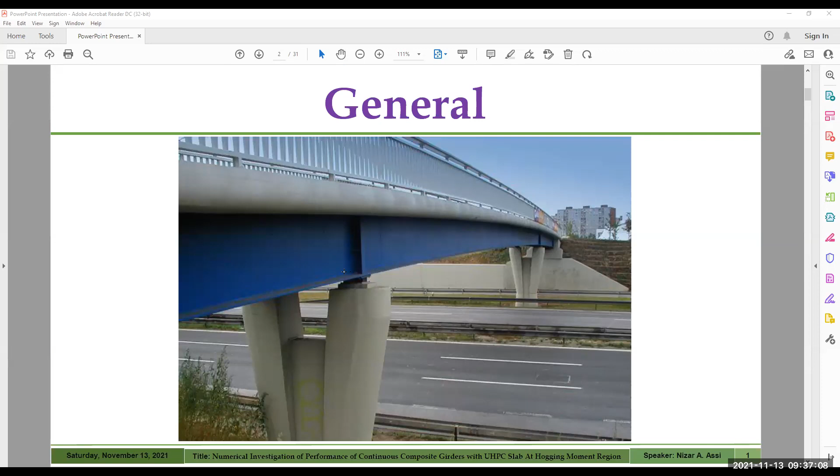One application we see in real life is the bridge, where we have steel beams that support concrete slabs. The most important thing in composite construction is that it mainly depends on the composite action between the concrete slab and steel beam.

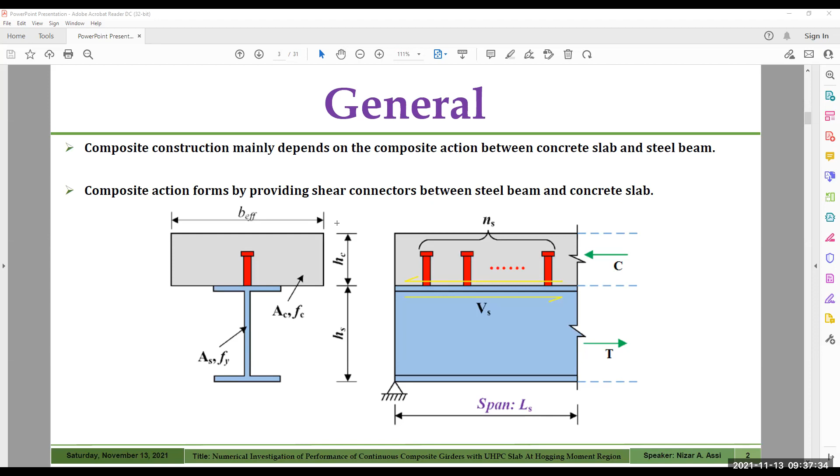This composite action forms by providing adequate shear connection between the steel beam and the concrete slab. If we don't provide any shear connection, there will be a huge slip between the two sections and no interaction between them, with slip taking place at the interface between the slab and steel beam.

With a partial connection, a partial interaction between the two materials will take place, and a small slip will happen at the interface. With a full degree of shear connection, we'll have full composite action, complete interaction between the two materials.

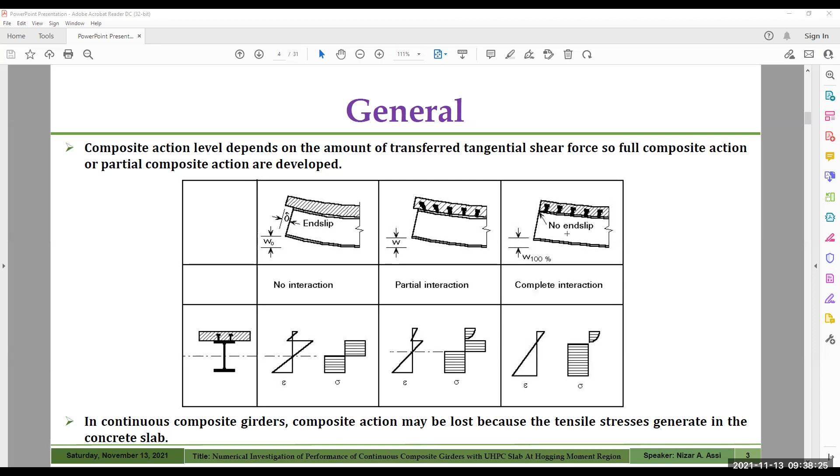However, in continuous composite girders, this composite action may be lost due to the tensile stresses generated in the concrete slab. Different researchers have tried

different construction schemes to maintain the composite action at the Hogging moment zone for continuous composite girders, like internal and external pre-stressing techniques, carbon fiber reinforced polymer (CFRP) sheets bonded to the top of the concrete slab at the Hogging moment zone, and steel fiber reinforced concrete at the Hogging moment zone.

I did an experimental study to investigate the behavior of these girders retrofitted or strengthened using ultra-high performance concrete. The findings were that the composite action and the negative moment were maintained for the service load level.

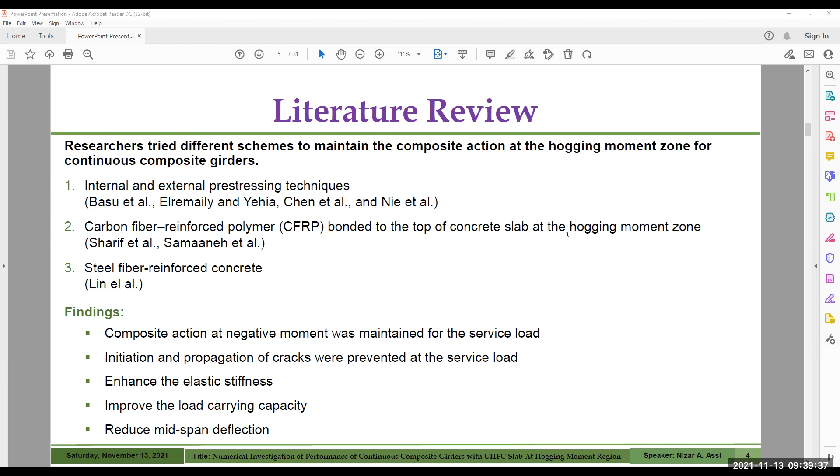The development of cracks was prevented at service loads, and we increased the service load level. An enhancement was obtained for the stiffness of the girder and the load carrying capacity, and the mid-span deflection was reduced as well. The current research

is to develop a three-dimensional finite element model for the continuous composite girder with UHPC slab at the Hogging moment zone, using the commercial nonlinear finite element software ABAQUS. This model will be developed for composite girders with the ultra-high performance concrete slab at the Hogging moment region and will be validated with the experimental results as done previously.

This validated model will be employed to conduct a parametric study to evaluate extra variables of the UHPC slab, such as the effect of the UHPC slab length. I consider only one variable, the effect of the UHPC slab length at the Hogging moment zone, on the behavior of continuous composite girders.

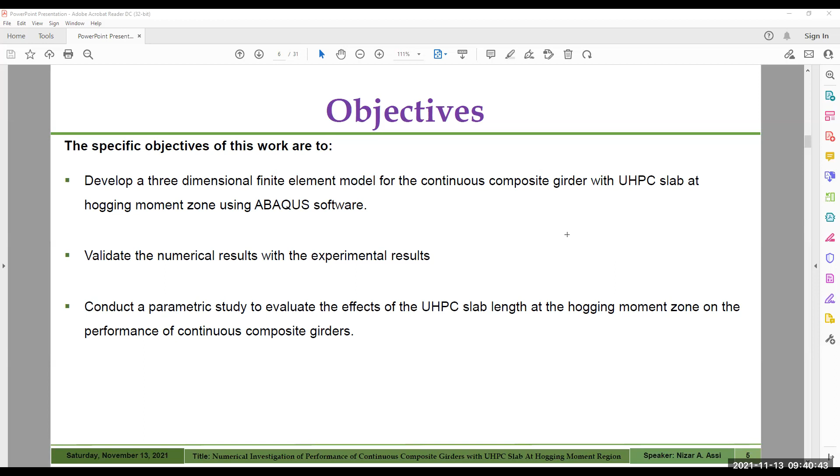The ultra-high performance concrete was cast at the negative moment region, which has a length of 1300 millimeters. The load is applied at the mid of each span, two-point loads, one on the left span and the other on the right span.

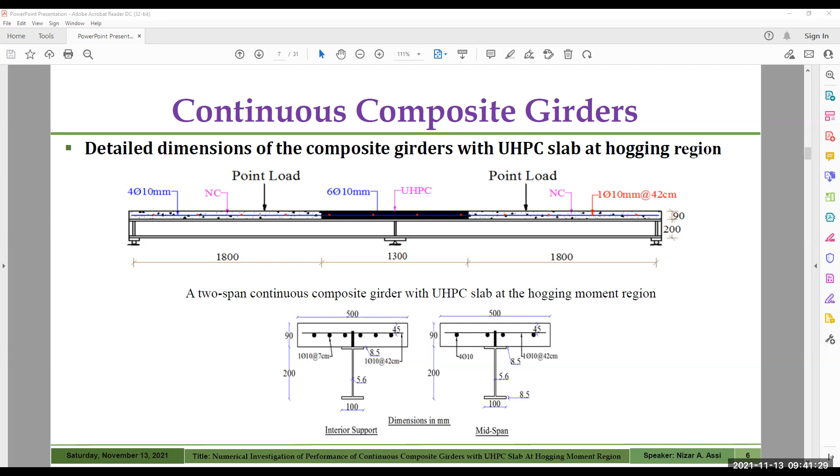The experimental work conducted previously considered only two variables: the spacing between the shear connectors at the negative moment region, meaning the degree of shear connection between the concrete slab and the steel beam, and the thickness of the UHPC slab used at the hogging moment region. So four girders were cast and tested experimentally to consider these two variables. But that experimental work did not consider the effect of the length of this UHPC slab at the hogging moment zone.

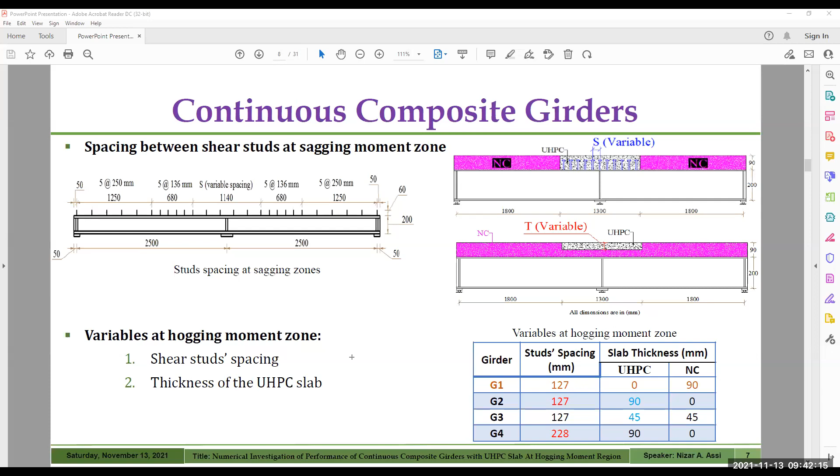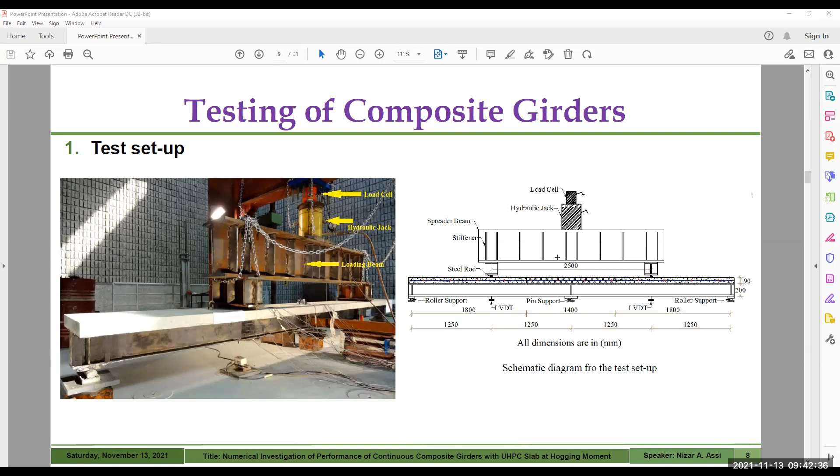Now I will talk about the content of the current study: finite element modeling of continuous composite girders with UHPC slab at the hogging moment zone. Different models were developed using ABAQUS software, a finite element based software, to conduct this numerical study. Four models, identical to the experimental study, called G1 up to G4, were developed for the sake of validation and calibration of the model. Another six models were developed for conducting the parametric study to evaluate the effect of the length of the UHPC slab on the performance of the continuous composite girder.

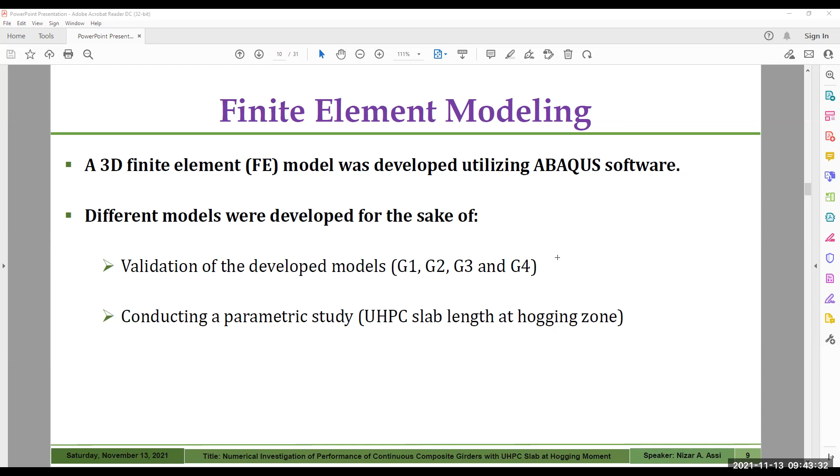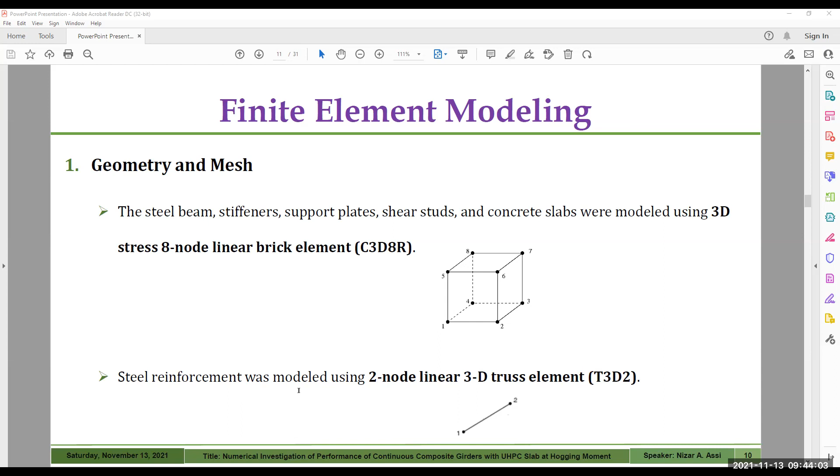First of all, let's talk about the geometry and mesh modeling. Different elements were incorporated in this finite element modeling for the steel beam, steel stiffeners, steel plates over the supports, the shear studs, and the concrete slabs. A 3D stress 8-noded linear brick element was used to model these parts, while for the steel reinforcement, a 2-node linear 3D truss element was used. The geometry of the developed 3D finite element model and the overview of the mesh model are shown in these slides.

Mesh sensitivity analysis was conducted to reach the proper size of meshing that will not affect the behavior or the results of this study.

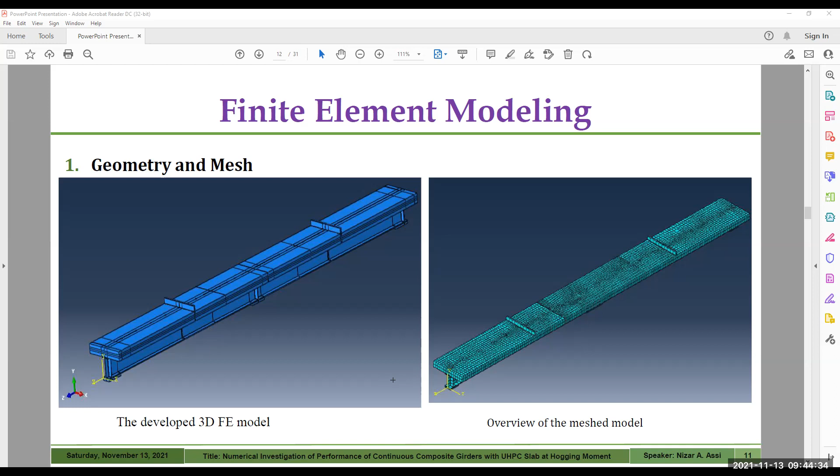For the interaction between different materials and bonds in the model, we have different contact types as shown in this table. Tied, or perfect bond, was used to model the connection between the stiffeners and the steel beam, bearing plates and the concrete slab, and shear studs and the steel beam. While normal and shear friction was used to model the interaction between the concrete slab and the steel beam, the layers of normal concrete and ultra high performance concrete, and the shear studs and concrete slab. The steel reinforcement within the concrete slab was modeled as embedded elements inside the concrete slab.

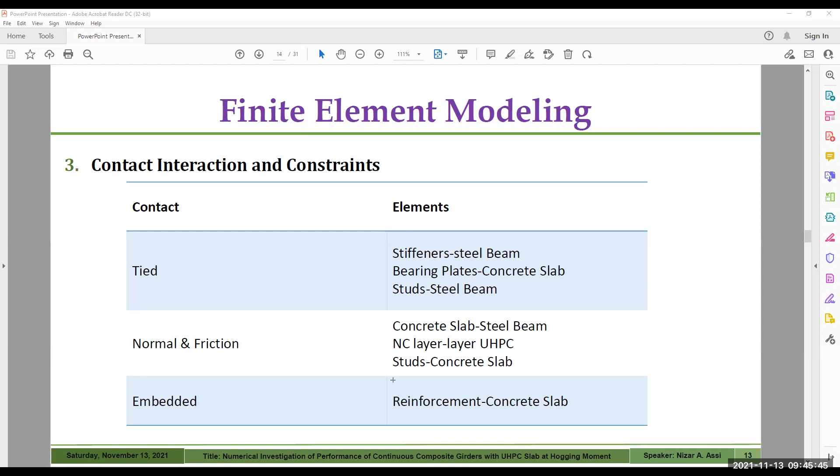For the material modeling, normal concrete and ultra high performance concrete were modeled using the concrete damaged plasticity model. For the elastic properties within the elastic range, this table shows Young's modulus and Poisson's ratio. As you see here, the Young's modulus for ultra high performance concrete is double that of normal concrete, so we expect that the behavior of girders strengthened using this type of concrete will have higher stiffness within the elastic range, and this will be observed when discussing the results.

Material nonlinearity was considered in the model, so the stress-strain diagram for concrete materials in tension and compression was modeled in ABAQUS software.

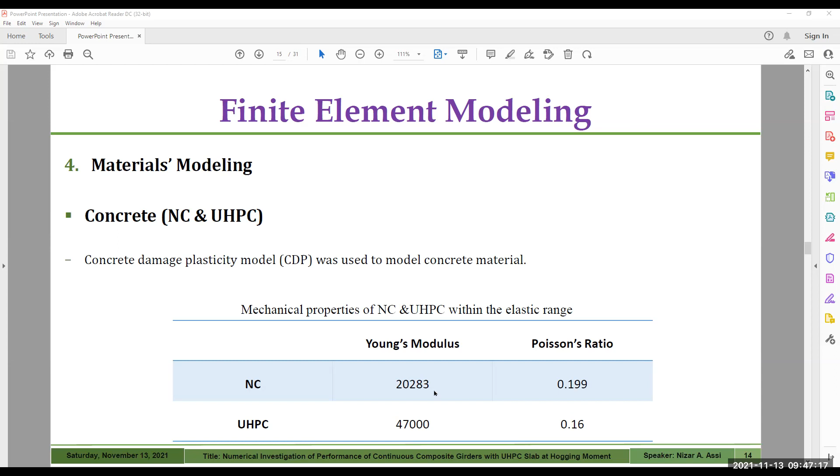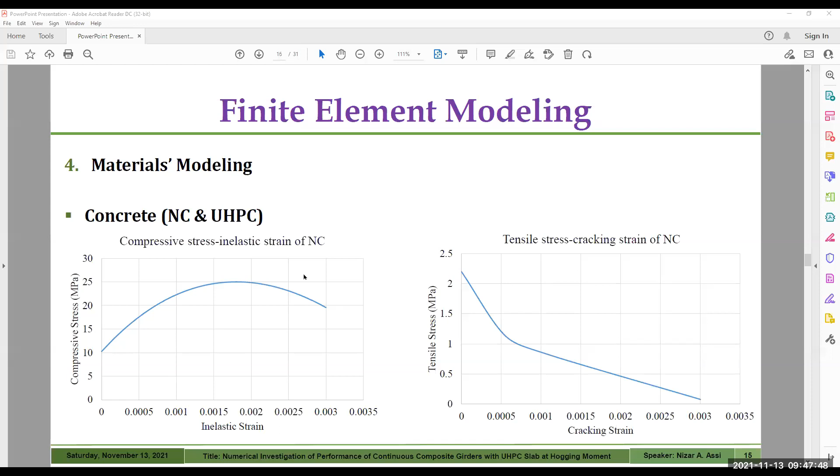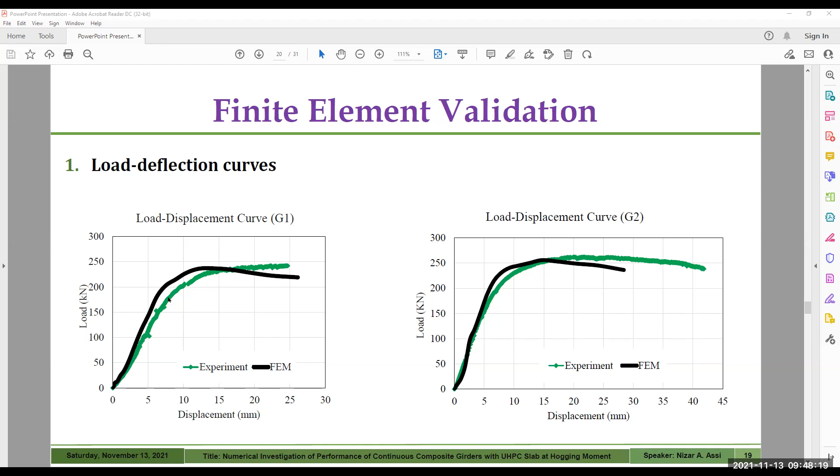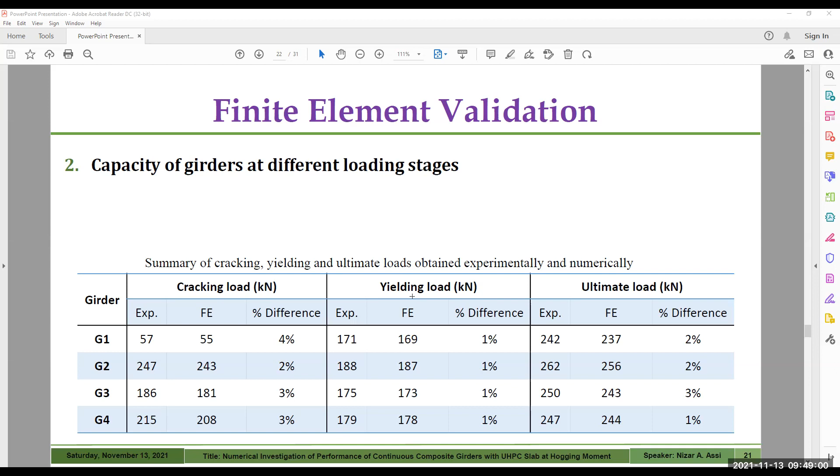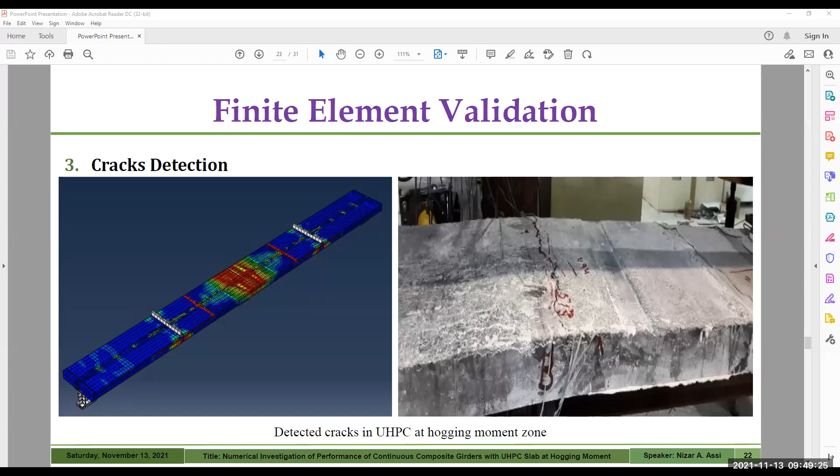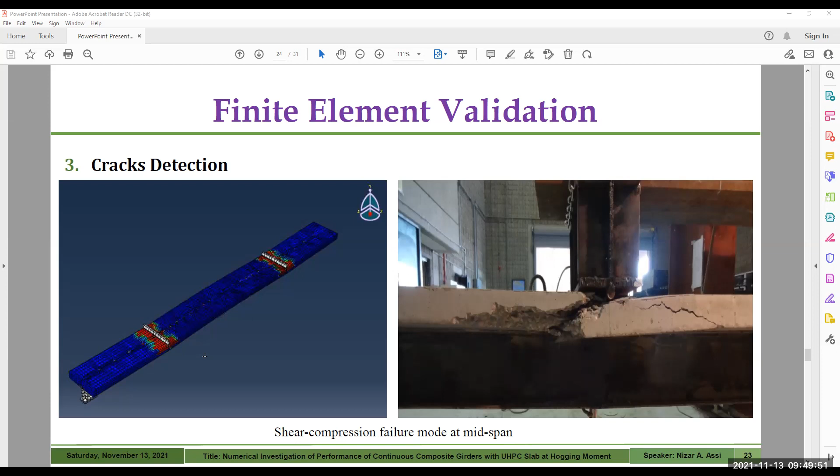The model also detects the mode of failure, the shear compression mode of failure, which took place at the midspan in the concrete, on both spans, because we have symmetry in the specimen. So we can conclude that this model is validated and can be used to predict the effect of new parameters which were not tested experimentally.

Therefore, we decided to extend this experimental work numerically and investigate the effect of the length of the UHPC slab, to see what is the probable length that achieves the desired performance of the UHPC slab.

From the experimental study, we concluded that half depth UHPC slab thickness and 50% degree of shear connection are sufficient to achieve the desired performance of the continuous composite girders. Therefore, I will continue with the numerical analysis using 50% of full shear connection and 45mm thickness UHPC slab. The only variable I will show now is the length of the UHPC slab, this length.

So I tried numerically to model the continuous beam considering different lengths. First one with no UHPC, which is the control specimen. Second one with a 300mm length, up to 1500mm UHPC slab length. And then we'll see the results now.

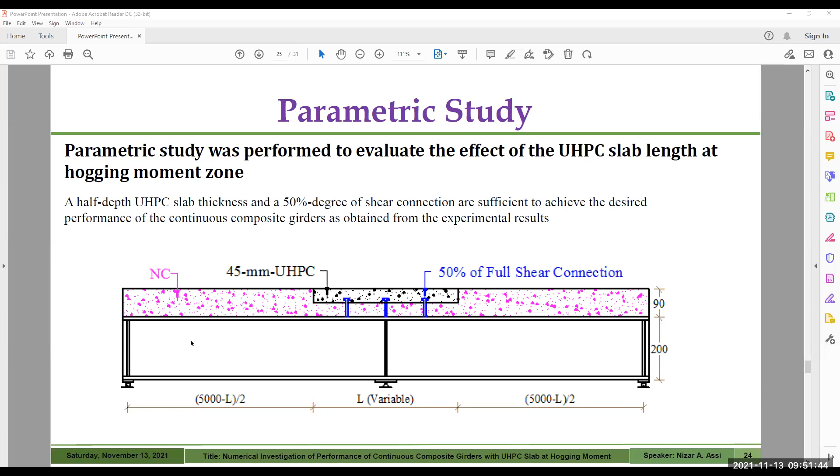Within the elastic range, during this early stage of loading, as increasing the length of the UHPC slab, the stiffness of the beam will increase significantly. But during the ultimate stage, there is no significant enhancement in the behavior of the composite girder with different lengths. So we can conclude that the length of the UHPC slab enhances the performance of the girders during the service life, not during the ultimate or failure conditions.

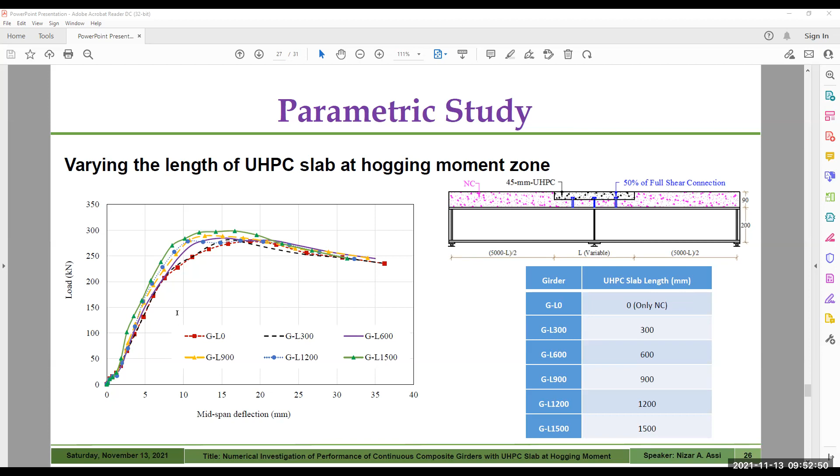In terms of cracking load and yielding load, as increasing the length of the UHPC slab, the cracking load and the yielding load increase as well.

But for the small length, from 0 up to 600mm UHPC length, the cracks developed within the normal concrete, not within the UHPC. With a length higher than 900mm, the cracks developed within the UHPC slab, and the cracking load increased significantly. For the yielding load, yielding of steel starts at the bottom flange at the midspan section, and the value of the yielding load increases significantly with the increase in the length of UHPC slab.

If we define a parameter lambda, which is the ratio between cracking to yielding load, we'll see that the value of lambda is less than 1 for the length from 0 to 600 millimeter, and is higher than 1 for lengths from 900 millimeter to 1500 millimeter.

Cracking load is the lower limit for the service life, and the yielding load can be defined as the upper limit for the service life of the girder. So when we reach a lambda equal to 1, we increase the lower limit of the service life up to the upper limit. The service life of the girder increases with 900 and 1200 up to 1500 millimeter slab length.

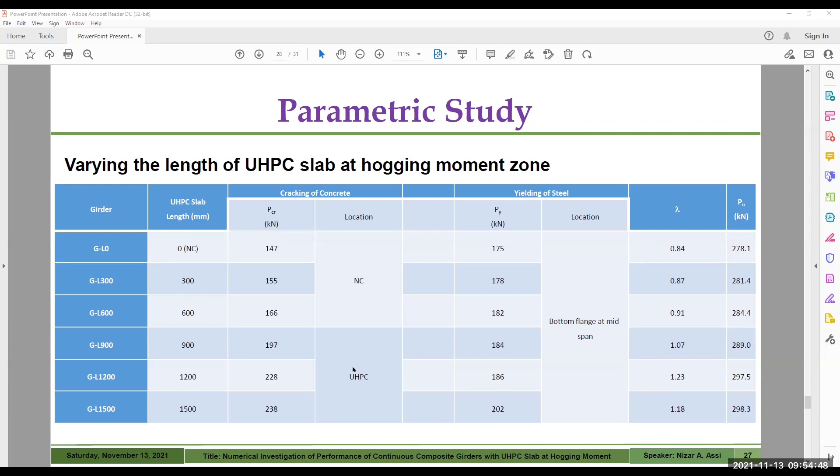The conclusions that can be drawn from this study are that the performance of girders was improved significantly in terms of stiffness, cracking load, yielding load, and lambda values. The continuous girder with UHPC length of 900 millimeter gave a lambda value close to 1, representing a satisfactory length necessary to maintain the composite action at the hogging moment zone. Therefore, it can be concluded that the length of UHPC slab at the hogging moment zone can be taken as 20% of the span length to achieve the desired performance of the continuous composite girder.